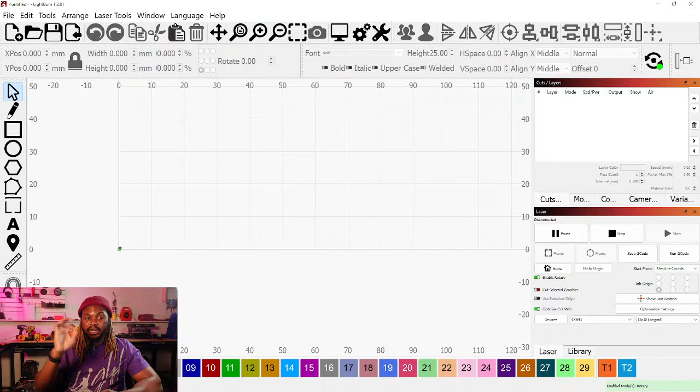So what I want to actually test is I want to see the line work and I want to see the engraving. So what I'm going to be doing is a fill text, and then I'm going to be putting a box around it so that I can see the engraving on lines and how it fills. Then we're going to try to dial in the power setting on the brass, and then we're going to do the same thing on the steel if we have enough time. If not, we can always just start the steel next time, and then we'll play with some anodized aluminum hopefully next time. Yeah, so that's kind of the plan.

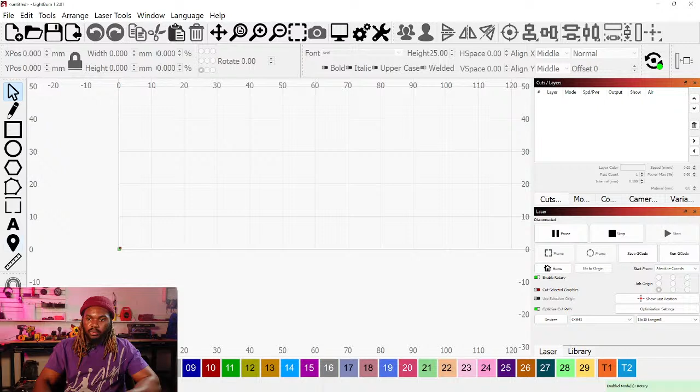So I want to start out with some text, and I just want to do something simple. Trying to be, I don't want to just put test, that's boring. I feel like whenever I can't think of something, I just use text. So what should we make this? What should the text be? Any ideas in the chat? What should I put for the text? These are very low stakes, guys. Low stakes here. If I can't think of anything, I'm just putting test.

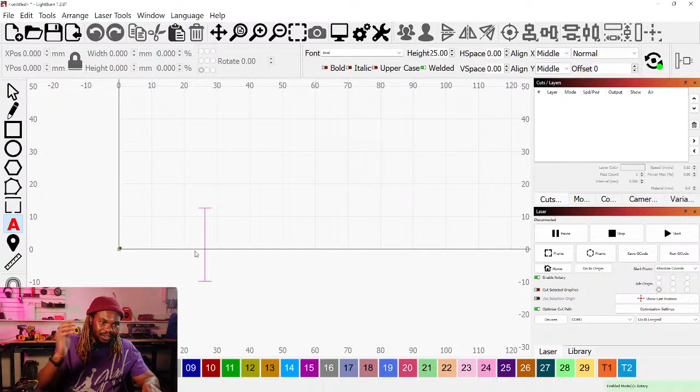Dave says text burn, John says great day, Jeffrey says Sienci laser. Josh is the winner, we're going with the company name. I am a company shill. Sienci. I'm sorry guys, I got to rep the company.

Oh, we could do some. Unfortunately, Valentine's Day is going to come right before our stream, or else I would just have a Valentine's Day stream and we can make some cool projects using that. So I'm going to put a box around it. Oh, we don't want that.

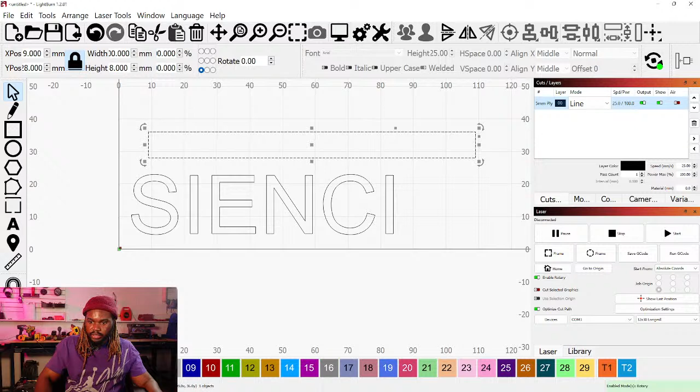We need to switch this to line. I need to switch the colors here. So the box, we need to switch up that color so we can switch it to line. And then we can use the text and switch that to fill.

Should be able to just orient that. And then I want to line it all up to the middle. So we're going to be using this align tool, align things vertically center.

And then I'm going to be selecting the entire thing, and we will put the coordinates as 0, 0, so it starts at the very bottom. It's nice and easy, wherever we set our 0 point on the center edge, that's where our 0 is going to be. And then our size here, we have 84 by 25. I think I'm going to make that a little bit smaller.

Let's go with, because we don't know how long this is going to take, it might take a little while, so we want to have a couple chances on this without having to respray. So 50 millimeters by 20 millimeters with a box around it.

I like that. Maybe we can make the text a little bit bold. Okay, perfect, I like that. So we're going to be able to get to see the fill, and we're going to be able to get to see the line work. So that is our goal.

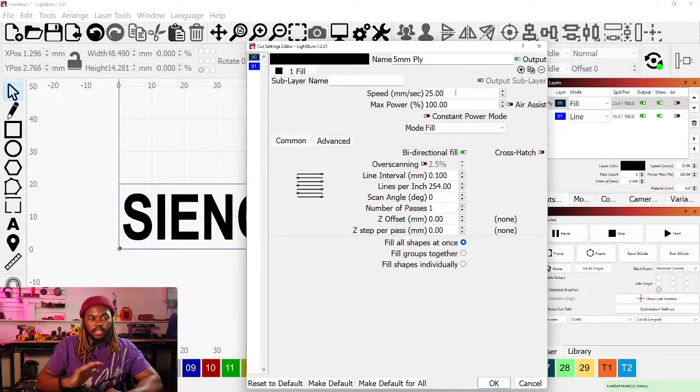So usually if I'm sanding the top, I'll use air assist, or if I'm cutting and I want to use less passes, you know, faster speed, I'll use air assist. But most of the time, I like to just throw the laser on and just run the job.

So guys, this is the normal setting I would use for any type of wood where I'm looking for a dark engraving, but this is metal. So I do kind of believe that a lower speed would be better for this. I want as much power as possible, but I do believe a lower speed might just give us a better result. So, you know, if it doesn't, we'll try again with different speeds.

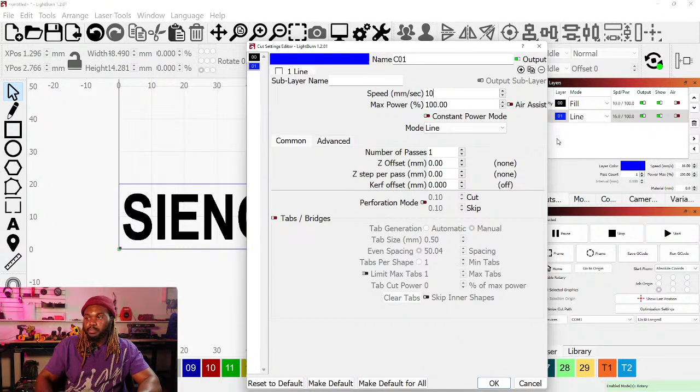So I'm going with 10 millimeters per second. If you have yours in millimeters per minute or inches per second or inches per minute, then you can do the conversion so you can match up the speed that I have here. So that's what I'm going with. I'm gonna go ahead and save the G code. Let's call this metal test 1.

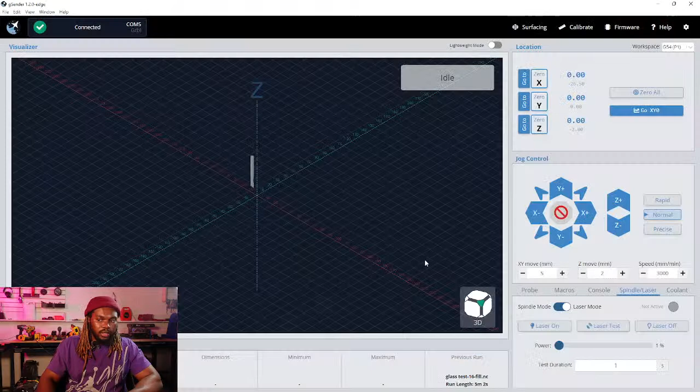All right, let's load our file in GSender Edge. Again, I'm using GSender Edge, you can check that out. It has more experimental features. Honestly, it's a better experience for laser jobs, and then eventually they will kind of merge a lot of the features in GSender Edge into the main GSender build.

We have an issue here. What was my issue? I forgot to turn off air assist. So we were playing with, sorry, not air assist, rotary. We were playing with the rotary a while ago for the past couple weeks, so it's been on and it saved that setting, but I need to turn it off or it's gonna think that it needs to go around.

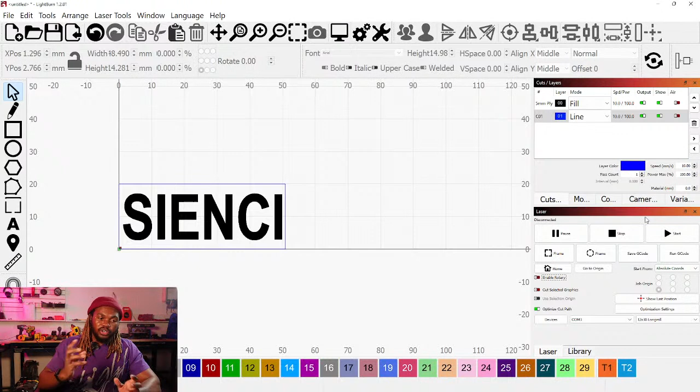It's gonna take the conversions from the millimeters per rotation, and it's gonna do some funky stuff. So I have to disable rotary axis, which is right down here at the bottom, right under the home button, or when you go into laser tools and rotary setup, you can disable it or enable it right here. So that's just for that.

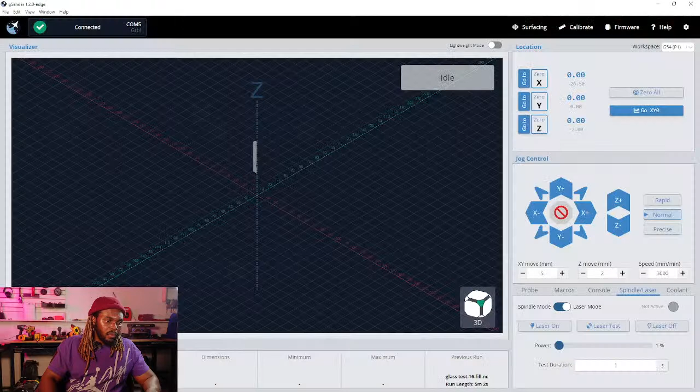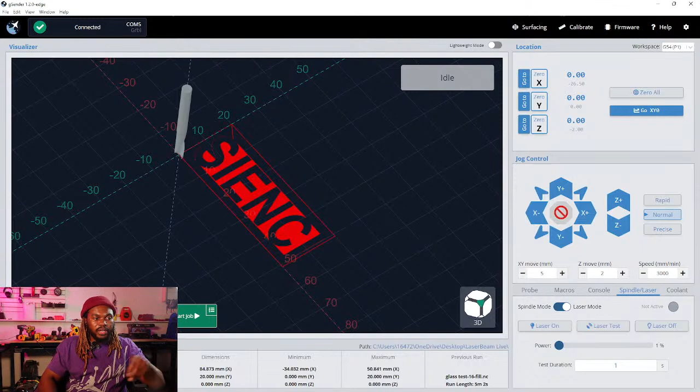Okay, so we have everything zeroed. Should be focused. Switch over so you guys can see here.

So I'm gonna be turning on my driver. I'm on dip switch 1.

So guys, how's the noise here? How's the noise with the driver? This is a new mic, so we're testing it out. Let me know if this is too distracting and we can figure something else out, but not bad. All good? Still hear me? No problem, alright, thanks for the feedback.

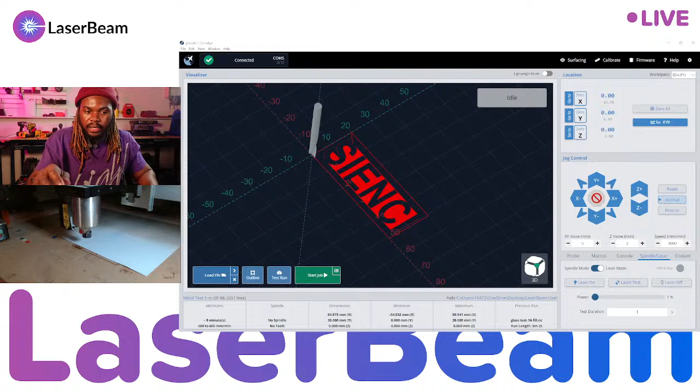So guys, you know, always wear your laser safety glasses. Like I say every week or every 2 weeks, no job is worth your eyesight, no matter how cool the project is.

So I'm just gonna align this. I'm just gonna try to align this by eye.

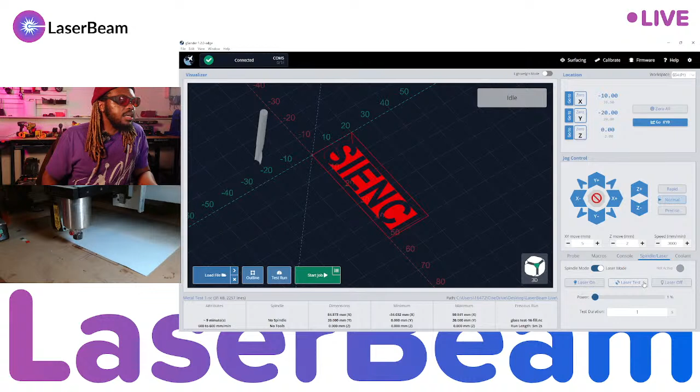And then I'm gonna throw on the laser test. Oh, so we're a little bit off. We're just a tiny bit off, so I'm just gonna lower that to 1 millimeter. And we should be all good now.

All right, awesome. I am going to zero everything here, our new start point. I'm at the right focus height. My lens itself is focused. This is the G2 lens.

I always use the G2 lens because the stock lens is versatile, it has the most efficiency, so it's good for cutting, and it has a pretty small beam size, not as small as the G7, 8, and the 3 element, but good enough that we can get some good engraving here. I'm not really doing too much detail work here, just some filled text and some on the line.

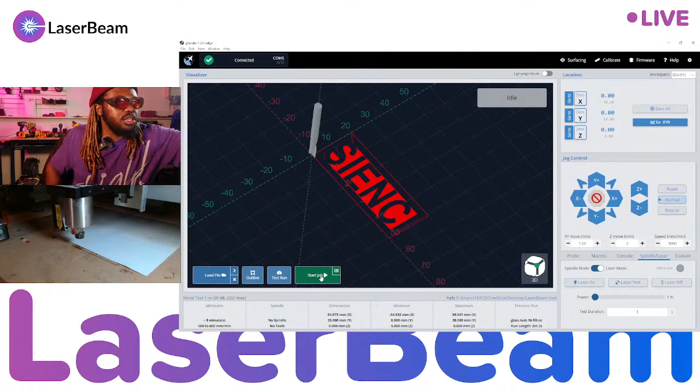So let's start this up. Everything's zeroed, code is on, driver's on. Just gonna make sure my fans are good, and we are ready to start the job. So I'll switch the view so you guys can take a look.

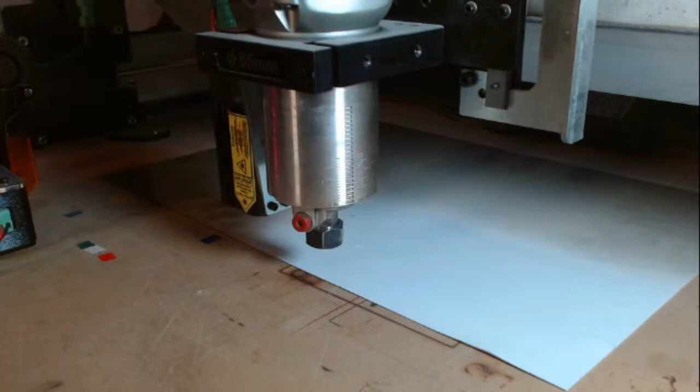So this product will actually make the metal spray or the engraving black. I'm not sure if they have other colors. I imagine they do, but you can see that white layer that's painted on, the brass. And the outcome should be a black engraving. So that's kind of what we're looking for there.

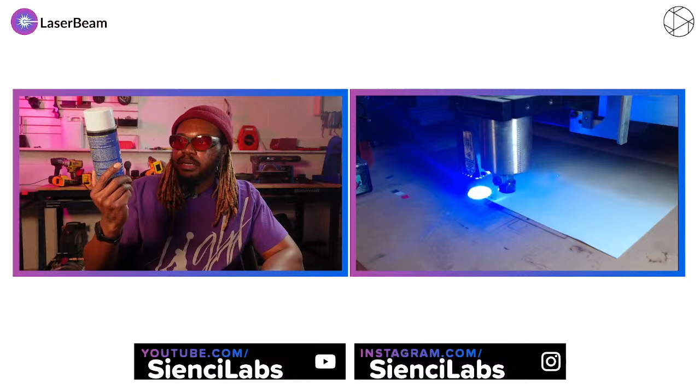So it's a black Brilliance Laser Ink, that's the company, and the product is black metal laser spray. It's an aerosol spray, just for your reference. But other brands make other types, and if I'm being honest, I would probably look for a cheaper brand, and unless the quality is really suffering, I would probably go for that.

You guys, so far I can see the black text appearing, but we really don't know until we wipe down the surface and we actually see, and then we don't truly know how good the engraving is until we try to scratch it a little bit and we try to remove some of it. So, because obviously, you know, we don't want the marking to disappear if you brush against something.

And certain settings are going to get better outcomes in terms of how long your engraving will actually stay crisp and clean and look very nice. So that's kind of what we're trying to dial in.

So the settings I have right now are working fine, but the real test is after we wipe it all down and we try to see how easy it is for it to scrape off. Because I could wipe it down and then everything smudges and the lines aren't clean. That's not too useful for projects, you know.

But we're gonna try a few different power settings. So I'm gonna try to wipe it down when I'm done. And then I'm just gonna go side by side and do a few projects at a few different settings to see what happens. And then afterwards, I'll give it a nice clean wipe down. We can look at the results and we'll see what we like, what we don't like.

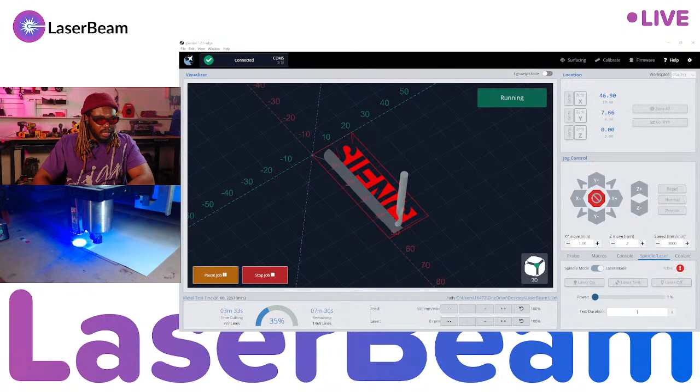All right, I'm going to switch over to this view. So you guys can see the G-Sender Edge Visualizer shows a lot more detail than the regular G-Sender. But again, there will be a point where these features get merged into the main G-Sender software once all the testing is done.

So for the next one, I kind of want to go up. So this was...

Bill had a comment above about smoke extraction. Bill got a smoke extraction hooked up, nothing fancy. He installed an Infinity Cloudline S4 with 10 speeds. The inlet is reduced to 2 inches. It works best at a setting of 3 to 5. 10 is too fast, surprised me. That's just cool stuff.

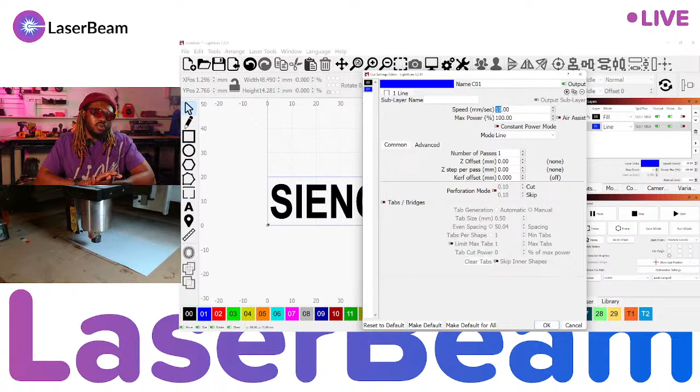The roller is not released yet. We will be releasing it. My goal is to release it around April for pre-order, and then ship no later than end of April.

So Dave, the Lightburn cannot be used for the router. This is just going to be for laser software. It does not do G-code for the router. For that, you're going to need softwares like Vectric, Carveco. I think Inventables has their thing, Easel and Easel Pro.

I'm getting to be a bigger fan of the air assist. Burns have been falling off lately, and the lens was junked up with residue. That is another reason why we use the air assist. It does help keep your lens clean because it's blowing away the particulate instead of it rising into your lens and creating more gunk that you'll have to clean. It'll also keep your aluminum assembly clean, and help keep the fan from gunking up after a while, pushing that problem down the road a lot longer. Definitely positives to using the air assist here.

How is the burn looking? Bill, that's really cool. I just saw your message about the fume extraction system. That's really cool. I do want to make a very simple and affordable fume extraction system that just hooks onto your dust shoe mount with an inline fan and some ducting, so you can take that outside and choose how long the ducting is for your needs.

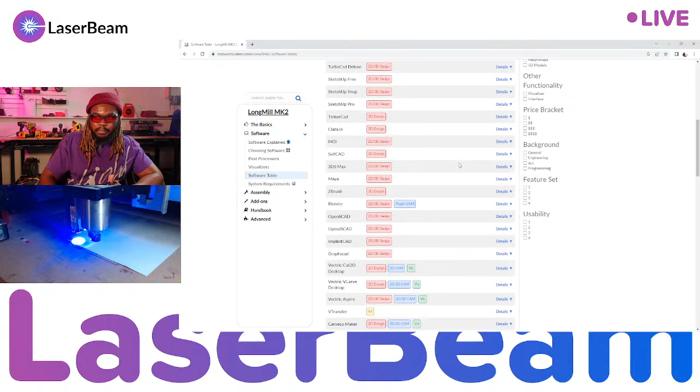First, we have Scott, our resident content creator, awesome guy. He talks about different softwares. We also have the toolchain wizard, where you can put in what you need from your software, whether you want paid or free options, and it will take you through everything and show you the different softwares available. We have a software table too, so you can see what's available, what it's used for, and check the details, whether it's CAD, CAM, a machine interface, or some combination. But if you use the choosing software widget in the resources section under software, you can plug everything in and it'll give recommendations based on exactly what you need from your Longmill. So definitely check that out.

D&D Bryant, yes, we have been thinking about it. Some people are stacking 3, 4, 5 lasers to get 10, 20, 30 watts out of a diode laser. Me personally, I would like to make a CO2 laser. I know a lot of people want different things, but I think a CO2 laser is the way to go for more powerful laser use. If you just want to buy your Longmill and have some laser accessory work, the diode works fine, 7 watts is fine. But for people who really do love lasers, really passionate about laser work, which I am, I think offering a CO2 laser is the best route for this company.

And we're talking internally about it.

And we love to prototype stuff and release new stuff. It will be a more intensive product development, but I believe a lot of the other engineers are excited for something like that, and we will just have to see how it goes. But yes, that is where I'm leaning.

That doesn't mean that one day we won't put out a 20-watt diode laser. It just means that's where my head is leaning. I do want to offer more powerful laser systems, but my head is leaning towards CO2 laser options.

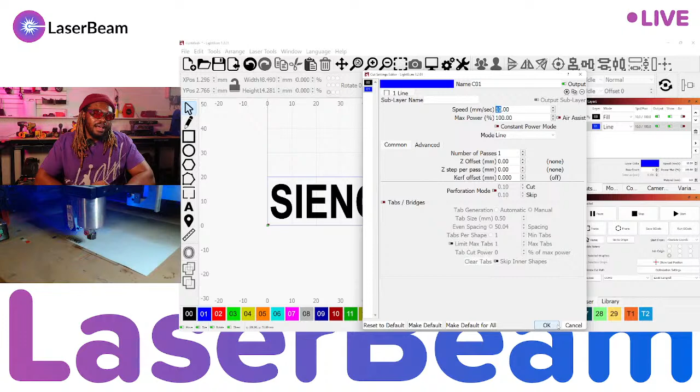Yeah, Dave. So Vectric is kind of that software because they do have the laser module add-on. I'm currently talking to Vectric, and they don't sell the laser module add-on to vendors like us yet, but they are working through that, and they might offer that in the future. So hopefully, if it works out for us and for them, you'll be able to just purchase Vectric from our website and also the Vectric laser module. But if you want an all-encompassing, all-in-one software, you can definitely check out Vectric and the Vectric laser module, and then you have everything in one software, other than a machine interface, of course.

But that's why we made G-Sender and G-Sender Edge. They're the best machine interface on the market right now.

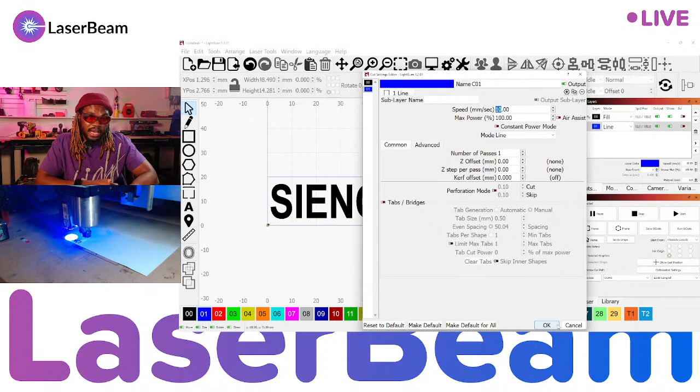So Jim asks, what is the status of the 4th axis CNC product? So both the laser 4th axis, which is going to be cheaper, smaller, for laser use, and the chuck style 4th axis, which is going to be more expensive and more robust for router use, are both being prototyped right now. Both are being designed internally, and I believe we'll be able to source parts in a month or two, and then we'll be able to start the pre-order process and hopefully ship before the summer. That's definitely my goal.

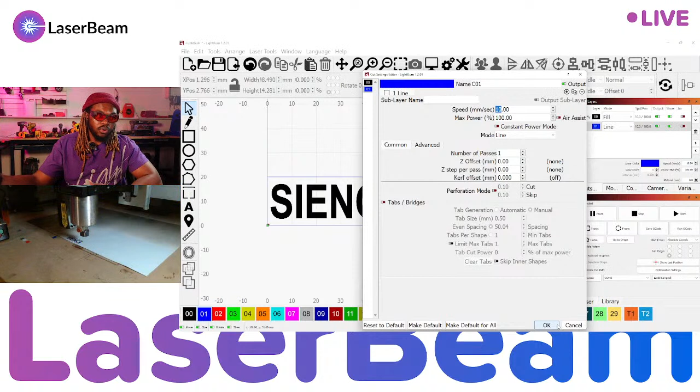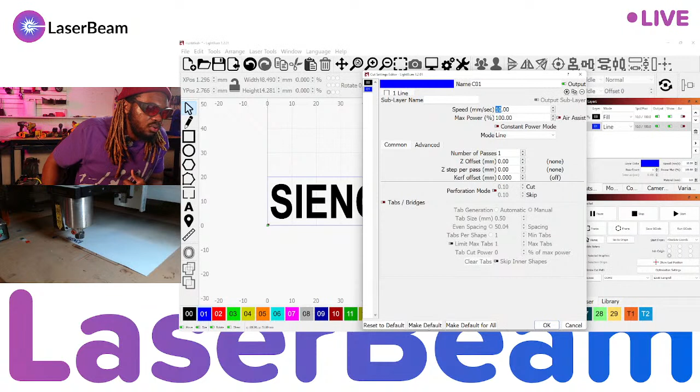So it is all finished. Doesn't look too great. The text looks great, but the border does not look too great, if I'm being honest. Let me zoom up on this so you guys can take a look. As you can see, we got the text there, you can see it in black. The real test, though, is how permanent is this? How easy is it to scratch? Will it wipe off if I add a bit of alcohol and wipe it down with a shop towel? Will it scratch off? So that is the real test.

So I'm going to be trying 25 millimeters per second for this second file. I'm going to run it again at 25. Metal test 2, 25 S for speed, millimeters per second. Let's just throw that up, refocus everything, and let's run that again. Again, I'm going to be doing 3 different versions, and then I'm going to wipe it off after, just for speed, and then we can see our results afterwards. So first, I'm just going to move this over.

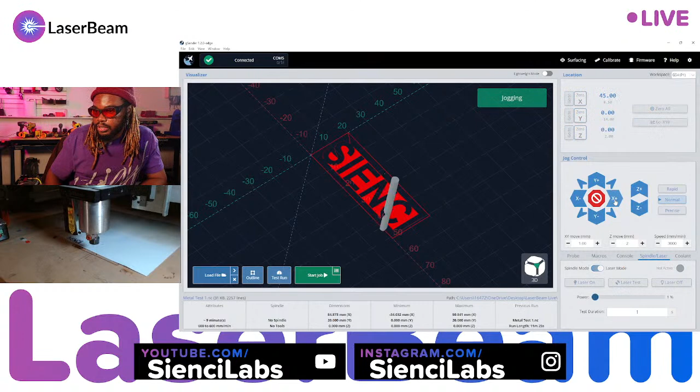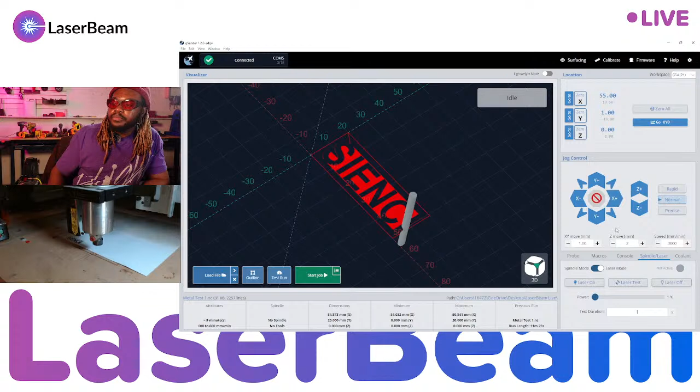So I just need to get a little bit past the edge. So that looks good to me. Focus it up a little bit. Right starting point. All right, that's a good distance away, so I'm going to zero everything again. I'm going to load up the new code.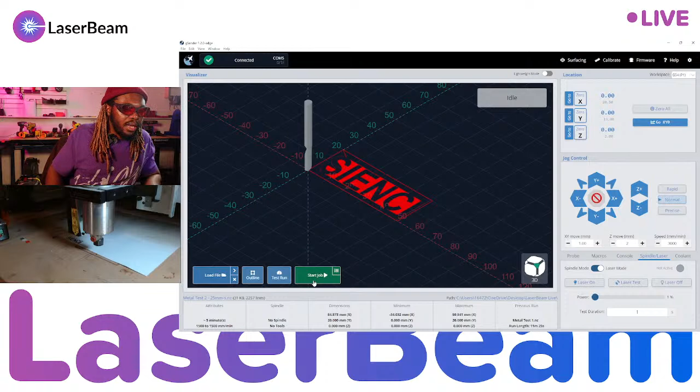So this is a faster speed, 25 millimeters per second. We're going to see the results there. And then I'm going to test 5 millimeters per second, the slowest out of all 3, and then we'll give it a wipe down, and we'll see which one holds up. I'm going to be using a knife to kind of scrape at it and see how easily it scrapes. Obviously, we're going to be wiping it down with some alcohol to really see the results, and then we're going to be doing a little bit of scraping to make sure we're not making anything too flimsy, or else this was very expensive. So I don't want to give you guys any subpar results.

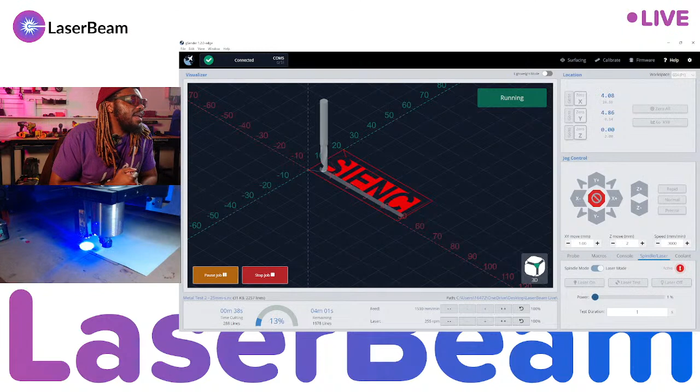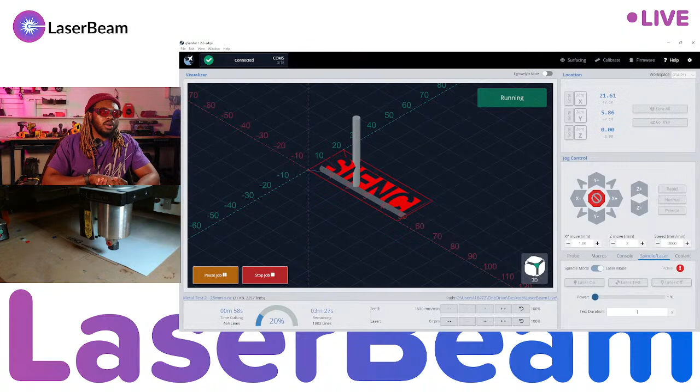Obviously, we could spend even more time lining up settings and things like that, but I think I'm giving it a pretty wide range with the 3 speeds: 10 millimeters per second, 25 millimeters per second, and the last one's going to be 5 millimeters per second. I feel like at one of those speeds, we should be able to see how things are sticking to the metal and see where we want to go forward if we wanted to perfect this type of job.

Let me double check, make sure I didn't miss any of your comments in the chat. So D&D, we talked about CO2 laser. I think by next year, we'll either be doing a multi-diode laser or a CO2 laser. We'll at least have started product development on one of those. So definitely a more powerful laser in the future.

Jim asked, what is the status of the 4th axis? So the chuck style 4th axis, the engineers are working on that. The team is working on that right now. I'm currently working on the laser roller for rotary axis. That's for the laser, it's going to be a lot cheaper. We're both developing right now, both teams are kind of developing right now.

And I hope to ship some rotary axis rollers out by May at the latest. But we all know, if you've ever been a part of product development, you just never really know. That's why I'm not really promising anything.

And they're a whole separate team, so they will release blog posts, they'll make videos for the YouTube channel or the Instagram or the weekly newsletter to update you on that. I don't want to give any updates unless they're personally giving them to me. Koala, you know better than that. We are not that type of company. We would never start developing something today to release to you next year.

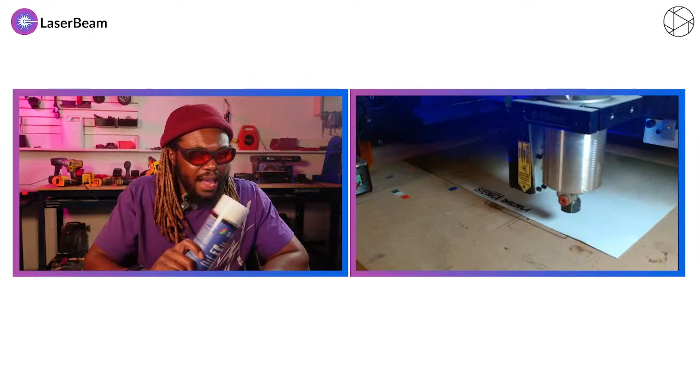So Jill says, interested to see how the brass engraving turns out. If it is good, then it could be used to create dies for foil stamping onto wood. I'm not sure how great it would be to create dies, because realistically, you're not really engraving the metal with the spray. You're essentially adding a spray, and then the heat is what's essentially merging it to the metal.

So I don't think there's going to be really an indenting process there. I think it's just going to be more of, wherever the heat lands, that's where the ink is going to stay. And it might actually be a little bit raised because of the ink. I don't think it should be too crazy, but I don't think it's going to really indent. So, but I'm not sure what type of project you're talking about, foil stamping. I'm not too familiar with that, so I don't want to put that out there and get your hopes up because you're not actually engraving the metal.

You still do need a fiber laser to truly engrave metal. What this is, is almost like putting a layer of ink on it, and the heat kind of causes the ink to adhere to the metal, right?

So is there going to be a pre-order? Yeah, I do believe we'll do a pre-order. We don't like to do too long of lead times. I think I learned my lesson with the original laser release where, because we put pre-orders so early in order to gauge interest, the product development ended up taking like 7 more months from the pre-order. So I do believe we'll make pre-orders available once we're around 4 to 6 weeks out from actually shipping, so pre-orders shouldn't be too long or too out of the way from actually getting your rotary axis shipped out. Again, I don't want to make any promises for the chuck style rotary axis.

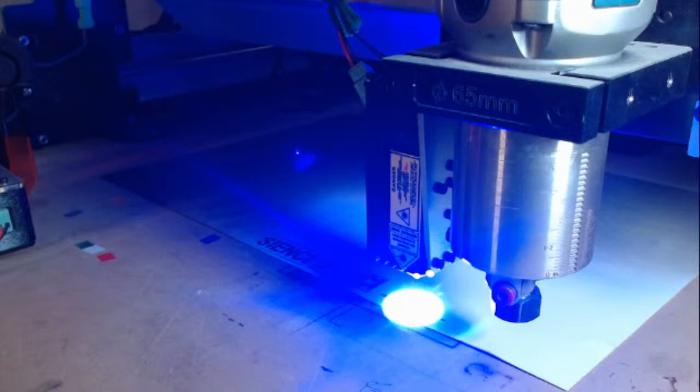36 degrees Celsius, that's amazing. Well, amazing, or depending on what the average is, very concerning with global warming. But let's not get into that. This is a fun stream, we don't want to think about all that sad stuff.

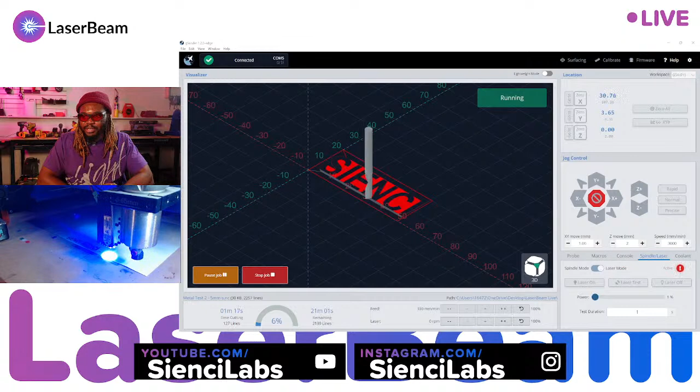Oh, Ohio's going sub-zero, that's Fahrenheit right? That's very cold, I'm pretty sure. You guys are living a very similar life to us, you get a bunch of snow sometimes. I believe in Ohio, you guys are pretty close to the border, not too far.

Dana's heading to Florida in a week. My man, very very lucky. Very very lucky, I'm very jealous. I would love to enjoy some sun right now.

Yeah you should be very glad, Jills. The northern hemisphere is down bad right now. We are struggling. Unless you like the cold - some people really do like the cold. I do not. I survive it because I like Canada and I like Ontario as a province, so I survive it every year, but I hate it.

Dave is in Los Angeles, that's awesome, just a little bit of rain. Yeah, I could do with a little bit of rain as long as the temperature's not too cold. In my perfect world, the coldest it should ever get where I want to live is windbreaker weather, or jean jacket weather - that's the coldest it should ever get in my perfect living location. But Canada, as many problems as there are here, I do love it. I was raised here, and I don't think I could ever move somewhere full time.

Oh yeah, nice, so we're getting rain. So we're gonna be slipping and sliding because it's definitely gonna be - yeah, it's gonna be horrible. We're getting the worst of all worlds, we're getting -30 and we're getting rain. Just a pleasure. I feel like singing the Canadian anthem right now. I should have a flag behind me because we are just getting blessed by the Canadian weather gods.

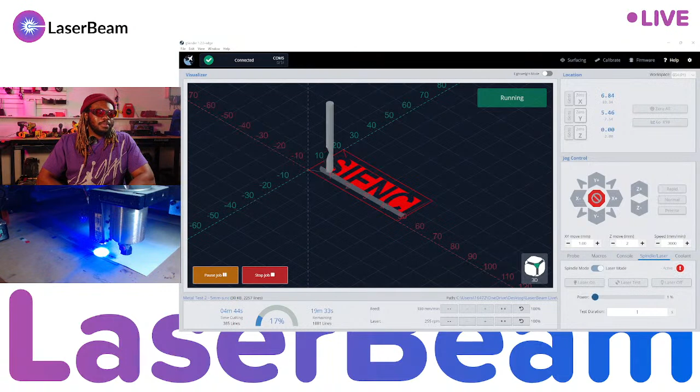So this one is going really slow, might take a little while. This might be the last one we run. I might run it at 50 millimeters per second, which is closer to the top end of the speed, but this job might take another 20 minutes, so I think I might just do that. I do want to see what this is going to look like. Sorry if this is a little bit boring and really slow.

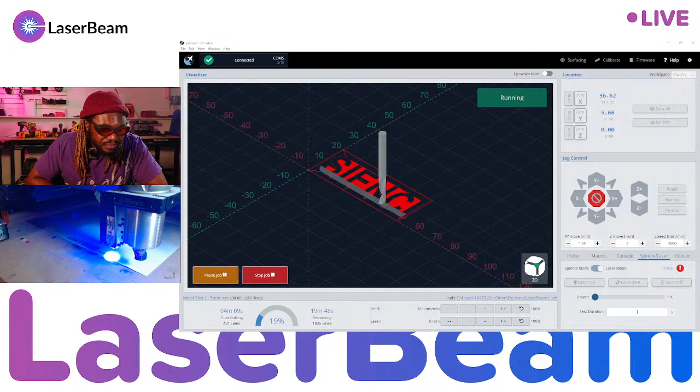Jeremy, that's great, I'm excited for you. Don't worry, our team is working very hard to get rid of the backlog of LongMill orders. We don't have such a large backlog with lasers because we don't get as many orders as LongMill, so we're able to ship a little bit faster. But trust me, the team is working.

I do kind of want to run it one more time because I don't know how the paint or the laser ink is going to react to different speeds and power. So I want to test it at 50 millimeters per second, which should be super quick, no longer than 5 minutes.

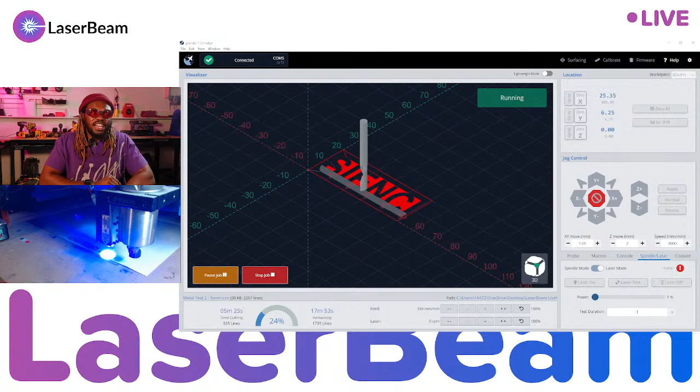Oh yeah, a lot of machines went out today. At least for the laser, we'll be clearing the queue. I think we're up to January 23rd, so we're only about 10 days of lead time on the laser. I'm not too sure on the LongMill, but they are pushing, and I do see machines going out.

Okay, so we're a little over a month on that.

Yeah Jim, all of these are running at 100% power at dip switch 5. I'm more using speed to vary power essentially, because they're inversely related. If you run a job at 10 millimeters per second and it's too dark, you can raise the speed, lower power, or do a combination of both. So for me, I like keeping at least one variable consistent and then changing speed sometimes, because that gives me a direction of how I want to go, and then I can start to line things up.

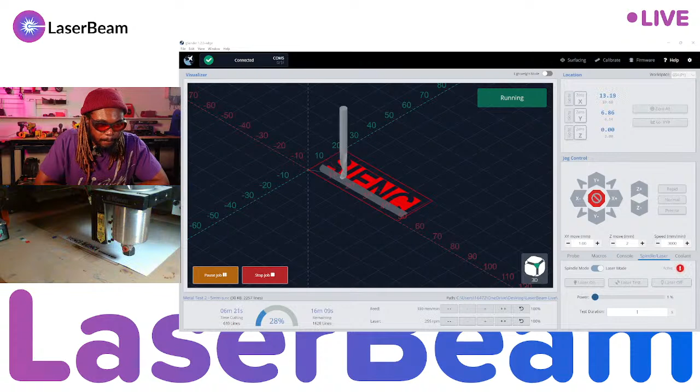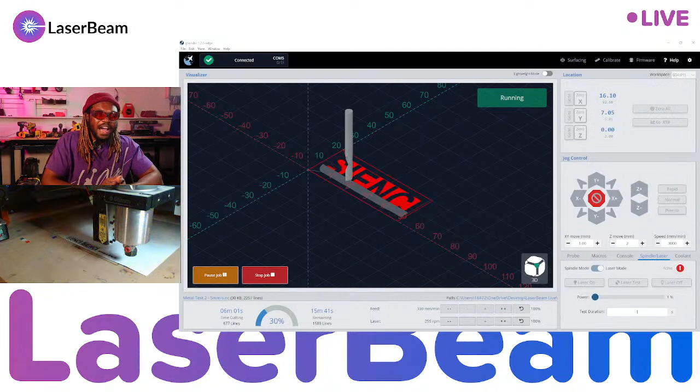For long jobs, you don't want to run the laser at 100%, dip switch 5, for an hour or too long, too many times, because it will slowly degrade the laser. Like most electronics, if you push them to the max for long periods of time, the excess heat will essentially damage the laser a little bit. It won't just shut your laser off or anything like that. It might lower the lifespan from maybe 2, 3, 4 years to maybe a year or two if you're using it as a workhorse production at 100%, dip switch 5.

The laser likes to, but we did improve our heatsink capabilities with this updated heatsink that should be shipping out, I think it just started to ship. So as time goes on, hopefully you'll be able to push it longer at max power, dip switch 5, 100%.

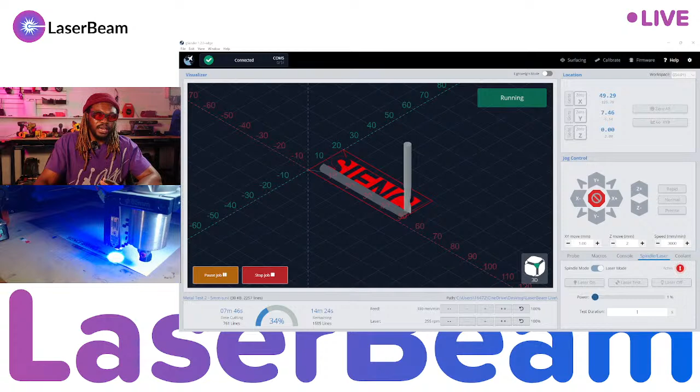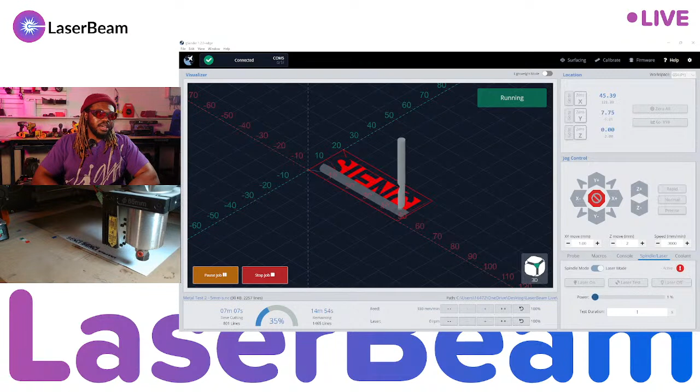But it is a little bit chilly in this garage, in this workshop, so I'm not too worried about pushing it too much because the ambient temperature is pretty low here, it's not warm inside. I could turn on heaters and stuff, but I didn't. That ambient temperature lowers how high the temperature of the diode and the laser gets, so that's one benefit of being in the northern hemisphere—you can run your laser at 100% power, dip switch 5, for much longer.

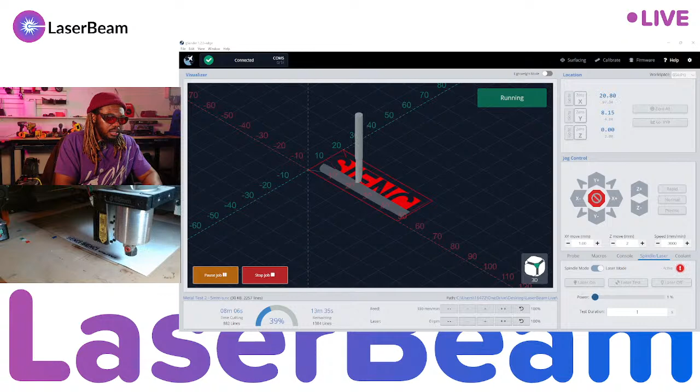Charles, we do have a status page that tells you where you are in the queue, I can pull it up here. So we have a status page on the website where you can see where you are in the queue, and it gets updated so you can see, oh, 10 orders went out today, so I'm number 20 in the queue. So this is the extension, it's sienci.com/order-status, and you can just scroll down the page and you'll see the queue.

We have an estimate, so right now we are just at about January 6th. So we've shipped up to January 6th, and you can find your order number in the queue. It's quite a lot, but we're a little less than a month in the queue. So if your order says completed, that means it did ship out, and you should have gotten an automated message telling you it shipped out with your tracking number.

We don't want to BS you or waste your time. We kind of want to give you this estimate - it's like an automated estimator. It tells you exactly when the order was placed and your order number, and it might be a bit of a pain, but you can count it out and see where you are in the queue.

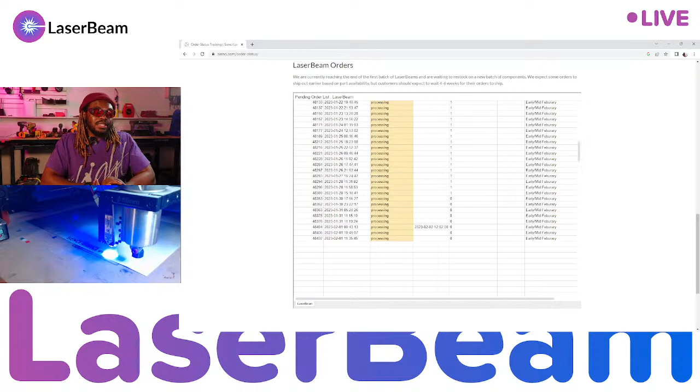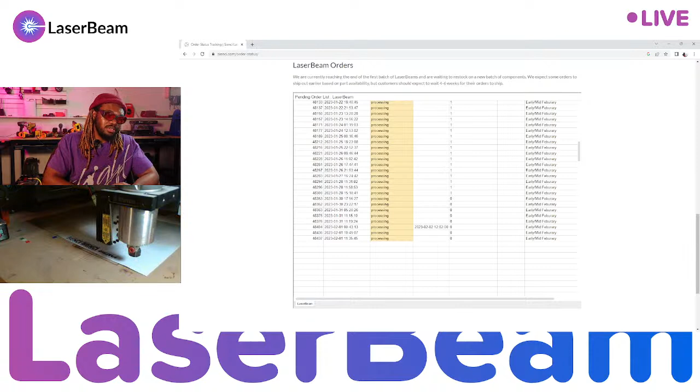Remember, for our US customers and our international customers, you'll have to pay customs. Sometimes UPS will notify you ahead of time so you can pay online, or you can call in, or when they knock on the door, you'll be able to pay at the door. We have been working on the back end to eliminate the customs charges based on certain regulations and things we've been playing with on our side, so you might not even have to deal with any sort of customs, at least for our US customers.

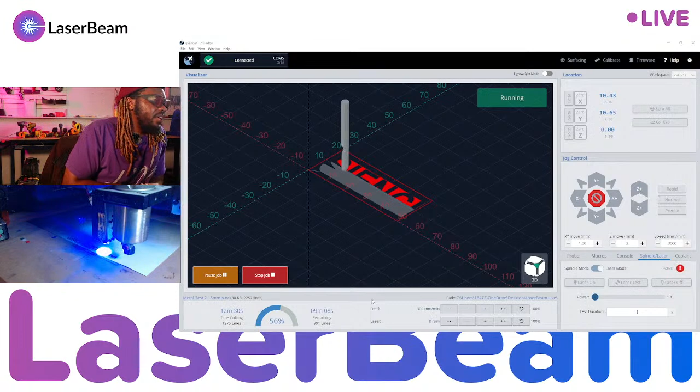All right, we are about halfway done, a little over halfway done. So we got about 10 more minutes. I think I will leave it there, and then I will clean these up so we can take a look at the results and call it a night.

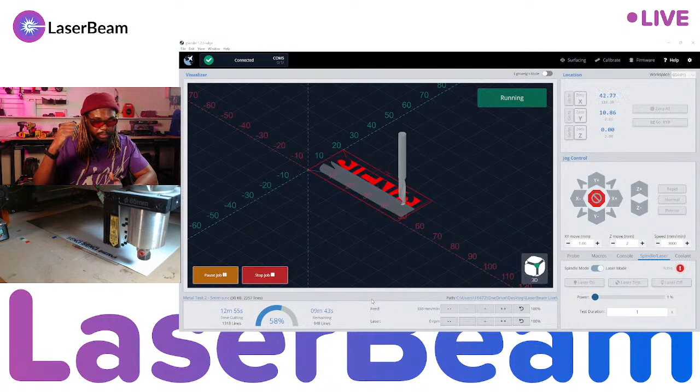I don't want to take up too much of your time, it'll be about an hour and 15-minute stream. Hopefully we get some cool results, so it gives you guys some inspiration to play with things very similar to laser metal spray. Some people have had good results just using permanent marker and engraving on the permanent marker with metal.

Yeah Jill, so I know Australia, you guys are down bad because you have customs and very high shipping rates - it's always hard to get things shipped to Australia, so that's kind of a double whammy for you guys. But hopefully you're enjoying it and it's worth it to you. Recently we've been playing with some of the tax codes and treaty codes with the U.S., so hopefully you guys aren't getting charged customs. We've been looking at the back end to get rid of the customs charges because a lot of our stuff is manufactured in Canada.

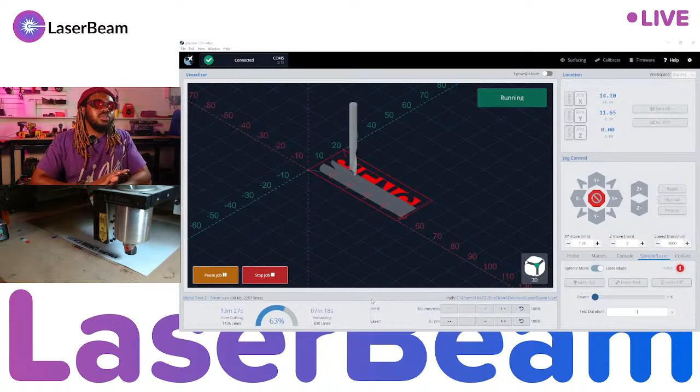So yeah, this will be the last one. We will continue the metal stream next week with the steel and maybe even some anodized aluminum, but we'll let this finish out because there's about 10 minutes left, and then we're going to wipe it with some isopropyl alcohol to get it nice and clean so we can really see if the ink bonded, and then we're going to do some scrape testing with a knife to see how resilient the ink is on some brass with this spray.

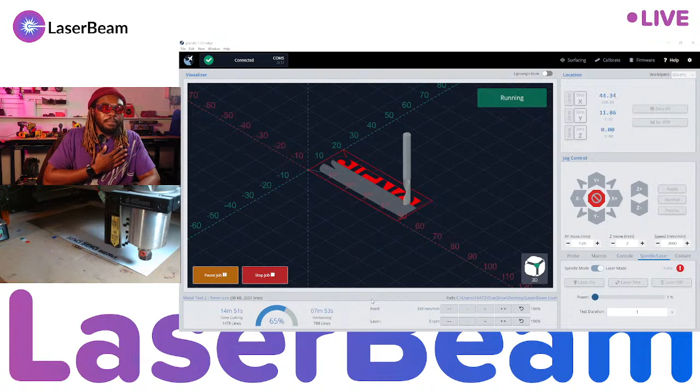Obviously it doesn't have to be bulletproof, but we would like it to be so that if you did a project and somebody scratched it a little bit, it doesn't completely run through the ink and ruin it. That wouldn't, in my personal opinion, be worth it for how expensive this spray is.

Although they do say on their website that it is made for higher powered lasers like CO2 lasers and fiber lasers, I do expect it to at least give us serviceable results so people can come up with cool projects. But I'll give you my honest opinion on it and show you the results before we go. We're at about 67%, so we should have only about 7, 8 minutes left.

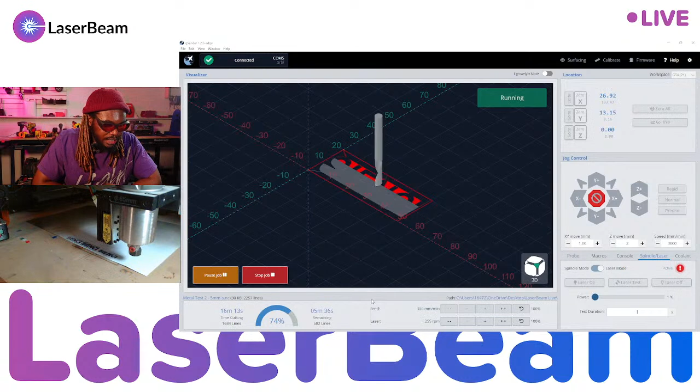We've got another 5 minutes of this project. How are you guys feeling? Who thinks this is going to come out perfect? Which speed do you think is going to make the most reliable results in terms of how well the ink bonded to the metal? Is it 5 millimeters per second, 10 millimeters per second, or 25 millimeters per second? What speed do you guys think is going to create the best results? Let me know in the chat.

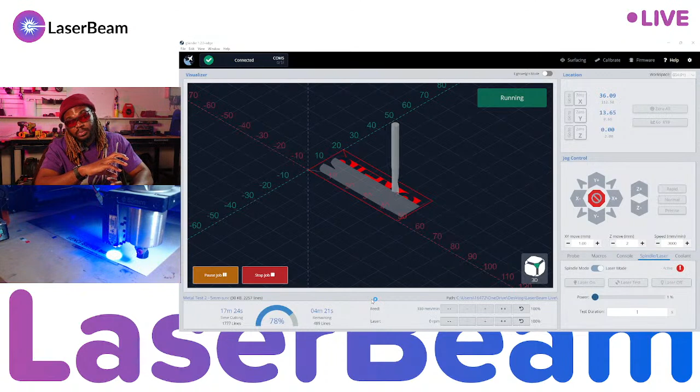We will know in about 5 to 10 minutes. Project finishes in 5, we're going to wipe it down. Let me know which speed you think is going to give you the best results. Is it going to be the super slow speed with the 5? Is it going to be the middle speed with the 10? I'm not 100% sure, I think you will run into some issues, but I think there are ways to optimize your Raspberry Pi to run it.

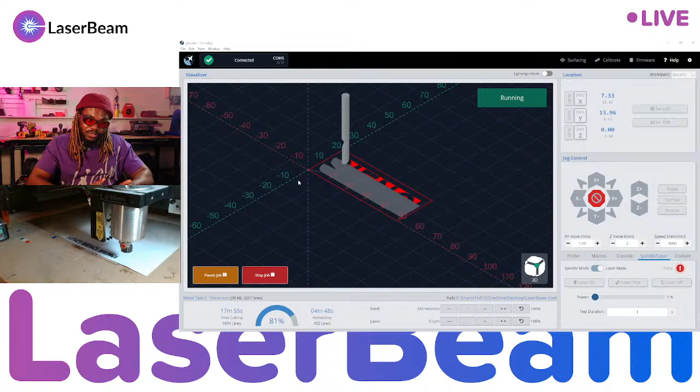I just don't think it's the most reliable thing, but I'm not 100% sure on that. That would be a great question for the forum, where some of our software engineers can pop in and answer. Or if Chris is watching right now, since he usually does pop into the stream - Chris, if you're watching, can gSender be run on a Raspberry Pi? Oh, thank you, Eric comes in with the save - he says the Pi 400 works great. So we got an answer right there, the Pi 400 works great with gSender.

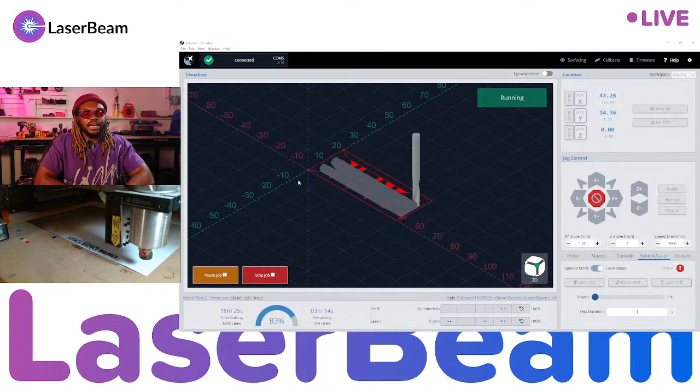But that'll be a question I can ask Chris and see what he thinks, and what the official answer is, so next time I can be a little more insightful in my answers. Thank you, Eric, for jumping in and giving Jeremy some info on that, we appreciate it. All right, we are almost done, guys, place your bets.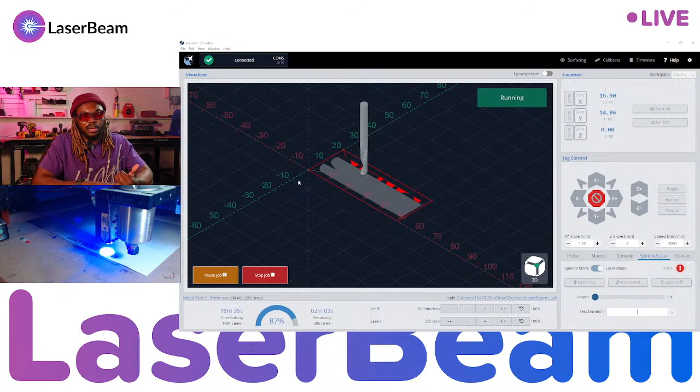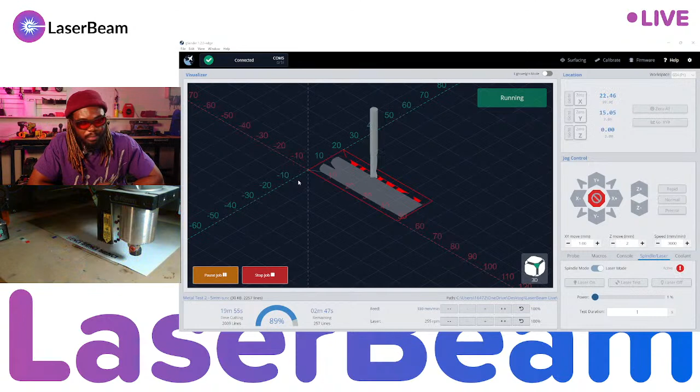All right, Jeffrey's guess is 5 millimeters per second, and Jill's guess is also 5 millimeters per second. Guys, get your bets in, there's only 3 more minutes left in the job. Which speed is going to have the best results? So Jeffrey and Jill are going with the slowest speed, 5 millimeters per second. We also did one at 10 millimeters per second - that was the first job. And Michael says 25, so that's the second job - he thinks the fastest speed is going to give the best results. I honestly don't know, I don't know how this ink is going to react to speeds, I was kind of just winging it. Jeremy guesses with the 10.

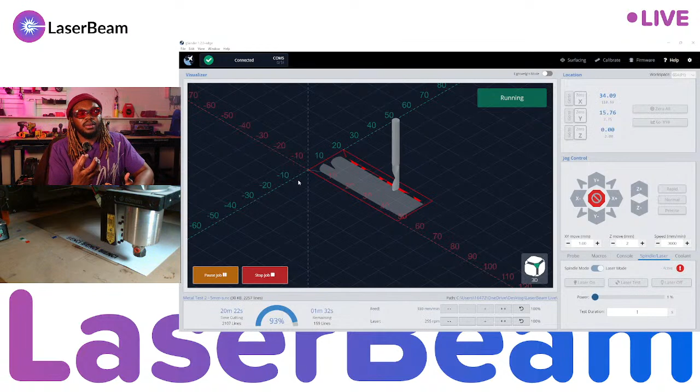Lowell. How do you pronounce that? I'm sorry if I'm butchering your name. But Weeks says 10, Jeremy says 10, Michael says 25, and Jills and Jeffrey say 5. My guess is going to be 5, just because that's always what I've known - if you're looking for more depth and more sting with the laser, you go with the lower speed, which means more optical power under it. So guys, I also think it's going to be 5. That's my guess, but when you're dealing with chemicals and stuff like this, you never really know. Sounds like, oh, low.

Awesome, I made things way more complicated than they needed to be. Low, thank you for joining the stream, Low.

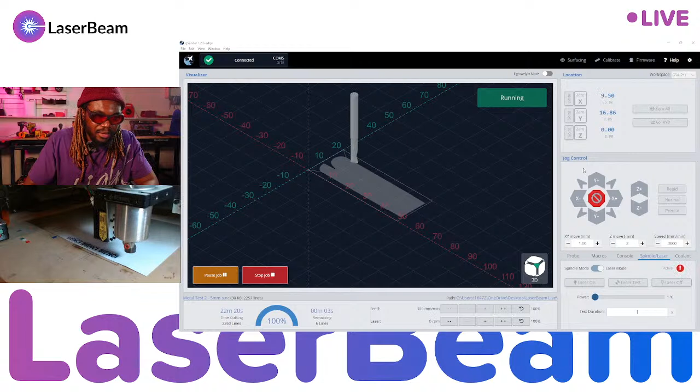Yillis, thank you for correcting me. I've been saying Jills this whole entire time. Yillis, thanks to you for correcting me. No, I appreciate being corrected, guys. I think I have a pretty unstandard name. My name is Ikenna, it's Nigerian. My parents are Nigerian.

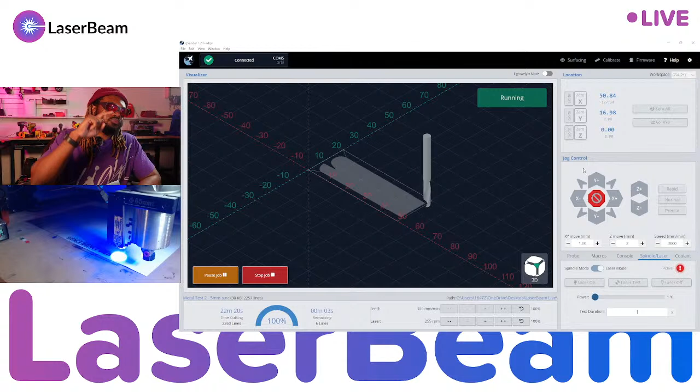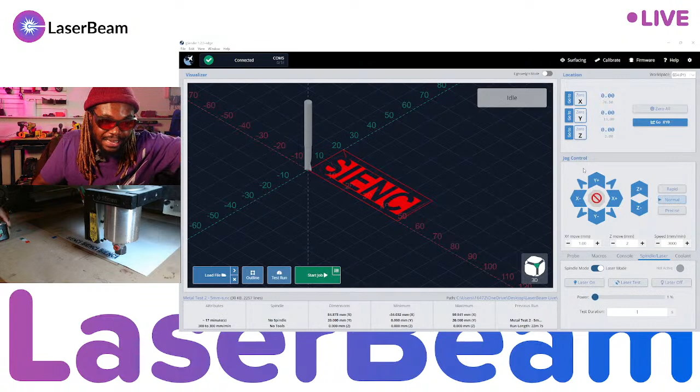Found your machines through IDC Woodcraft Channel and love the company story. I'm a developer too and love the open source contributions and great engineering. Thank you so much, Jeremy. That's what caught my eye. I was a maker before I joined this company, I was a product developer before I joined this company. And I just love the style that Andy and Chris ran this company, the open source, the commitment to engineering, the transparency with their customer. It made it very easy for me to join, made it very easy for me to excel at this company. And they gave me the opportunity to design my own product, the laser, and they kind of just keep pushing this industry forward.

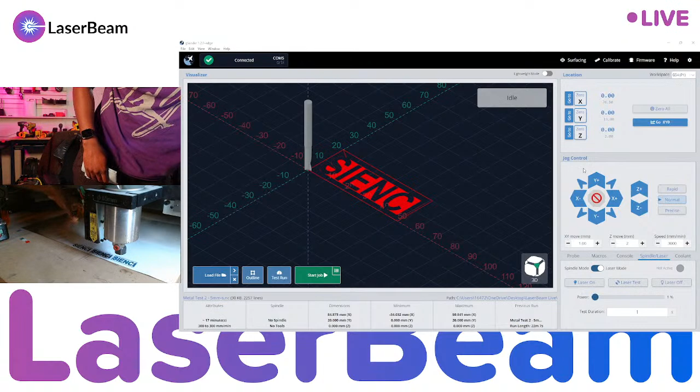So guys, it is done. We ran the same job 3 times at the same power, but different speeds. So we should get a little bit different outcomes.

All right, let's change the view here so you guys can get a better view. So you guys can see the spray itself was white and the actual outcome was black. That's what the can advertised, it was black engraving paint. So let's see how this actually looks when we strip this away, the paint.

So I'm just going to start with a little bit of isopropyl, and let's just wipe this all away. Okay, so guys, if you said 10, you were wrong, because it completely wiped off. The ink is completely gone with the 10. Let's go on to the next.